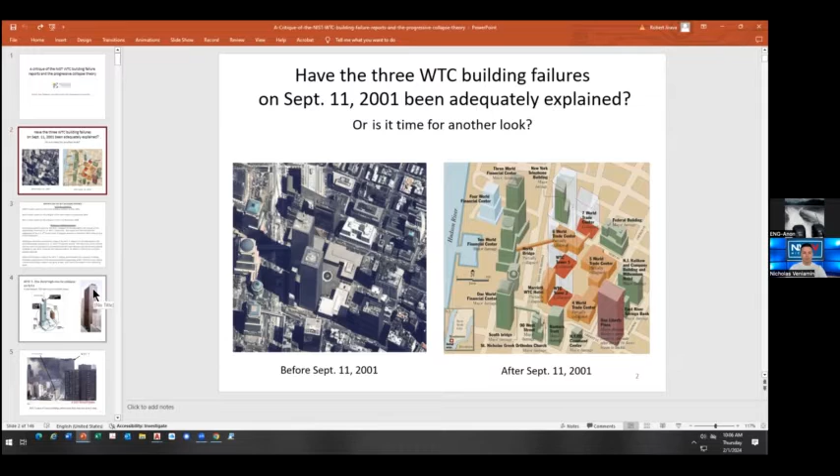This is a bird's eye view of it, what we call a plan view. What many people don't know, including myself until we took a good look at the evidence, is that this tower is built on a power station constructed prior to the tower going up. That power station is indicated at the footprint level in blue, the outline of the power station, and this crosshatch trapezoid is the outline of the tower built above it, World Trade Center 7.

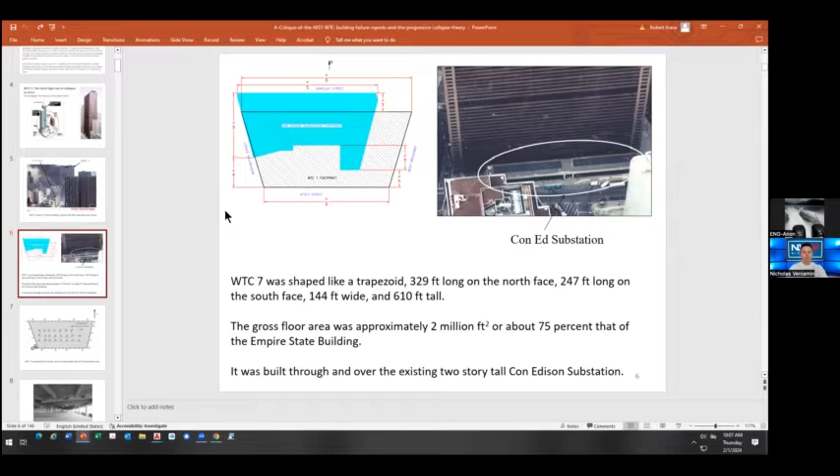This is a typical floor plan of World Trade Center 7. I hope you don't mind that I'm not dwelling too long on any of these slides, but one of the key areas as far as the official report has to do with this area of the floor plan, and in particular this column 79. They are labeled using these hexagonal numbers. A girder is a steel member in the floor supporting these beams in blue, the girder is in black, the beams are blue.

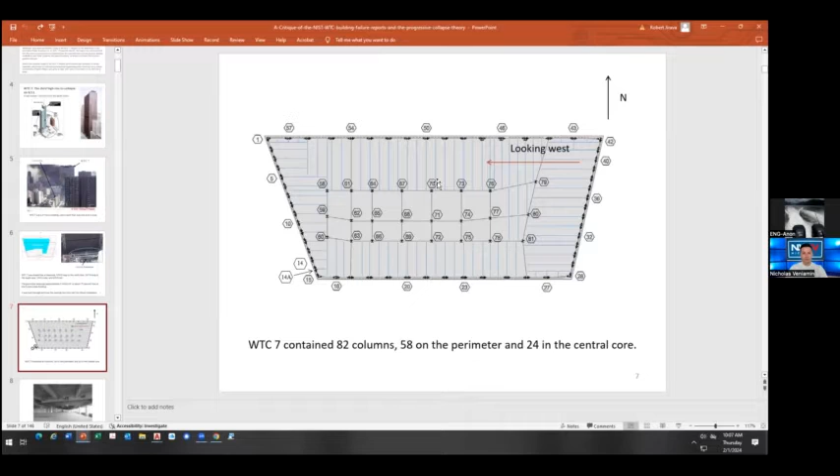In the subsequent slide, slide number 8, this shows what I was just pointing to. The black line is this girder, called a girder because it's picking up other beams. The NIST report relies on this area of the 12th floor level, supporting the 13th floor overhead, claiming fires burned here and caused this steel to expand. The fires effectively, according to NIST, pushed this girder off of its beam seat, which is off the extreme left of the picture, causing the girder to be unseated, and a progressive collapse ensued.

Now, we have gone through and shown that that is absolute nonsense. If we take a look at the video of that day, that collapse, let's see if we can get that to play.

There we go. For the third time today, it's reminiscent of those pictures we've all seen.

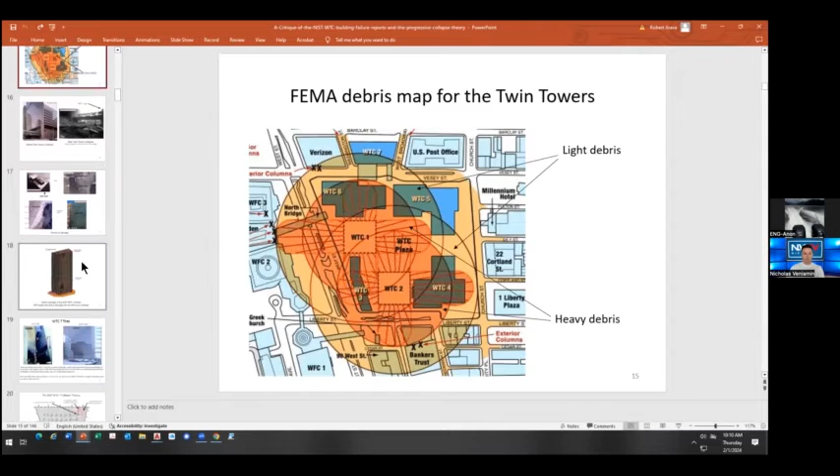NIST, when they modeled their building mathematically, took the trouble of representing the damage done to parts of World Trade Center 7 by the falling debris. Yet, oddly but not surprisingly, their report does not depend on any of this for the collapse.

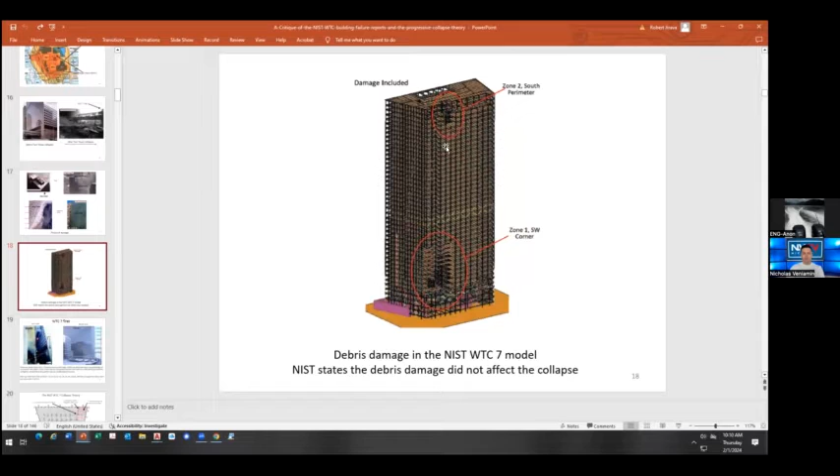Also, we have strong evidence that the fires NIST is alleging were happening on level 12 did in fact burn only for a short period and moved on. This is taken roughly 90 minutes before collapse, and you can see that the area where that column, beam, and girder I was talking about have long since gone cold, and the fire has migrated to the west, so it's no longer an issue.

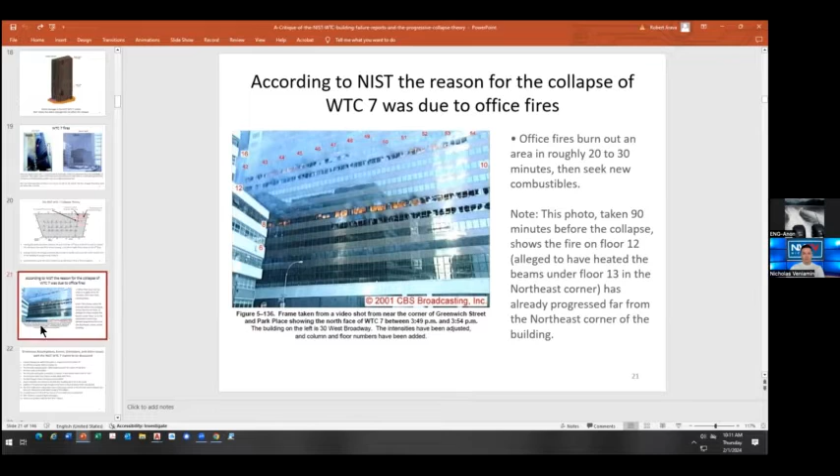We have evidence supporting everything, every step of the way. It does make me a little weary having to rush through it like this, because I cherish every piece of evidence. So I hope you don't mind, viewers, me flying through it.

In their report, NIST say the girder fell off the seat carrying it because it didn't have web stiffeners and wasn't retained by the column - it was just basically free to slide off. But we have located the steel fabricating drawings, and all of that information is actually recorded, and it shows that it's not the way NIST alleged.

You see, the girder end was actually fabricated with vertical plates called stiffeners, a standard feature in structural steel these days. In the 1980s, when this was going up, this was a relatively new development. It was designed to prevent local buckling and crippling of the end of the girder.

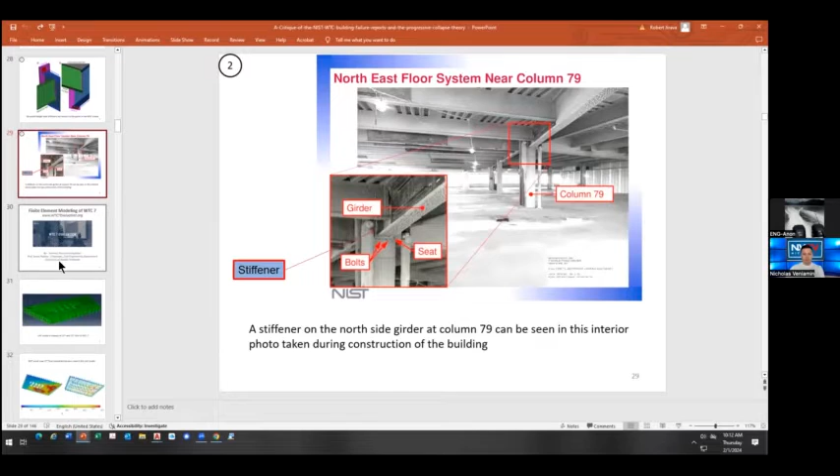Here you can see in this photo, slide number 29, that the girder was photographed indeed with those stiffeners in place. So it was also retained inside that column. There was really no way that the girder could have slid off its mooring.

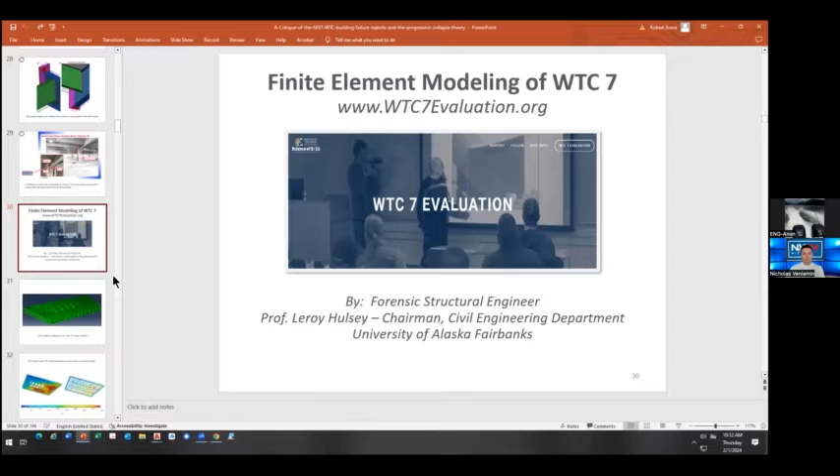There was a very careful analysis done by a gentleman called Leroy Hulsey, a professor at University of Alaska Fairbanks. He reconstructed World Trade Center 7 bit by bit, and subjected it to the fire loading that NIST alleges it used in its analysis. In short, we were unable to come to the same conclusion as NIST. In a nutshell, Professor Hulsey indicated that in order for the collapse to occur, we would have had to take out 8 floors of the structure in the lower part.

He stopped short of using the expression demolition because he does not want to be embroiled in any controversial matters. But he was actually hired by our organization, AE 9/11 Truth, and we have mathematically disproven that.

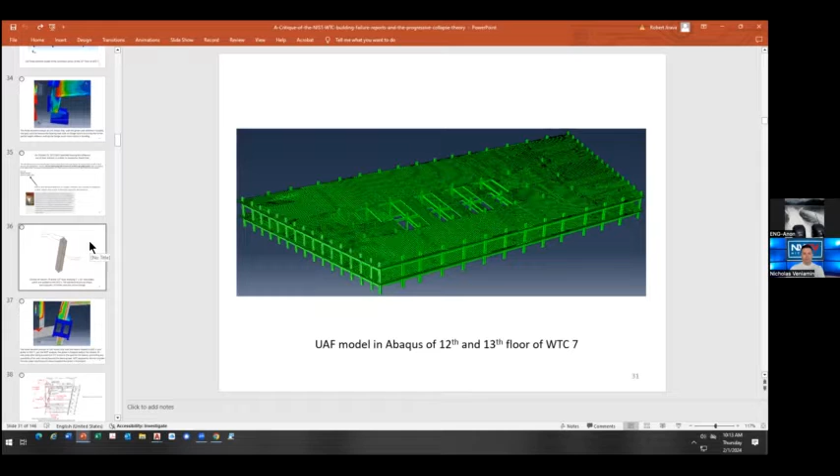Moreover, we have proven unequivocally that it's an impossibility for the collapse to take place, simply because if the joists - these beams holding up the floor - heated and expanded the way NIST says they would, they couldn't have pushed the girder off its seat far enough to cause this failure by bending the flange, because these vertical stiffeners are in place.

Now, this is good news for our argument, but it does, in a way, ultimately become moot, because the column wasn't constructed just as a plain I-shape. It also had these side plates welded to it for the full height.

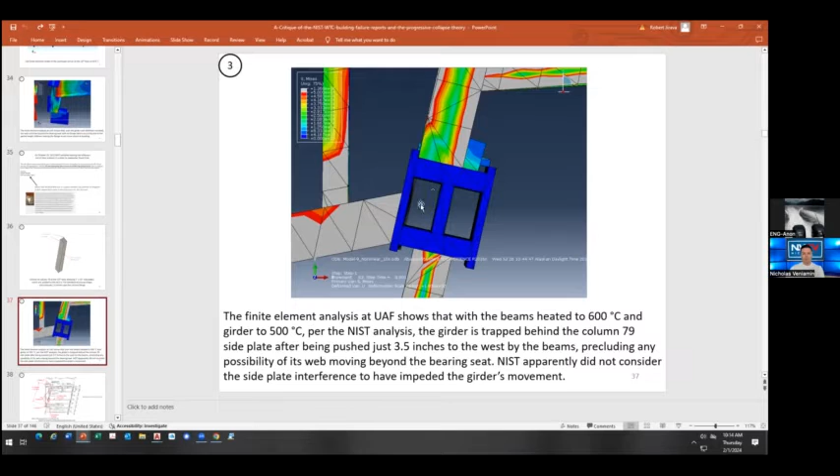The reason that was placed there was to stiffen the column so that it was compatible with the other parts of the structure. And you can see if this was pushing on the girder, it would have had no possible means of escaping that confined area, and the collapse simply would not have happened.

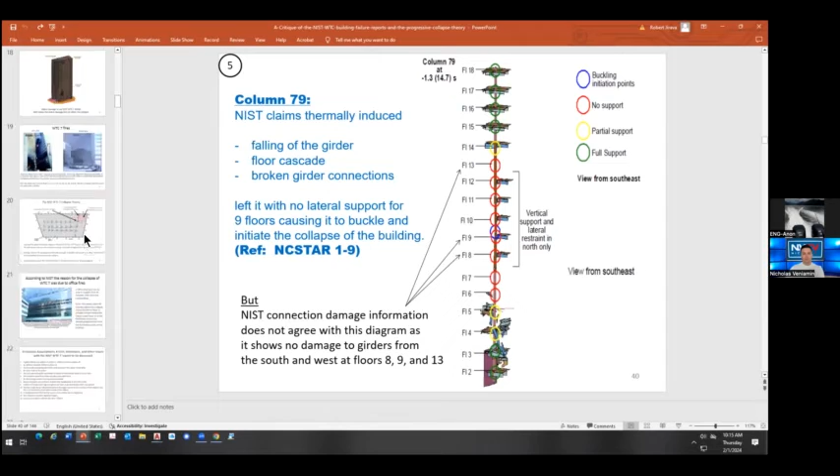I have to push ahead a little bit here. They also say that once that girder fell, the floor would have collapsed, leading to a pancake collapse of 8 levels, leaving this long, spindly, exposed column. It doesn't make sense to me, however, when I take a look at that plan, I realize that column number 79 is actually supported on every floor by these 2 beams framing into it. So it couldn't have possibly been that unstable as to buckle and fail.

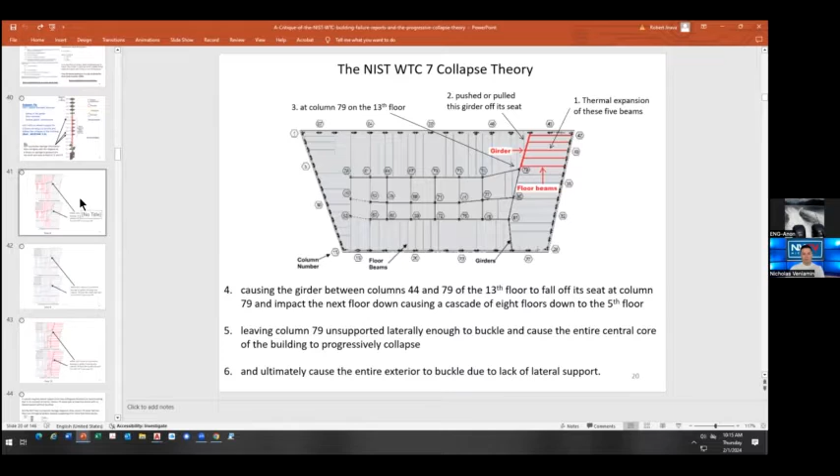So it's really, really treading on thin water. And NIST actually contradict themselves by indicating that in order to keep standing, the building would have had to have those connections anyway. So it's full of contradictions.

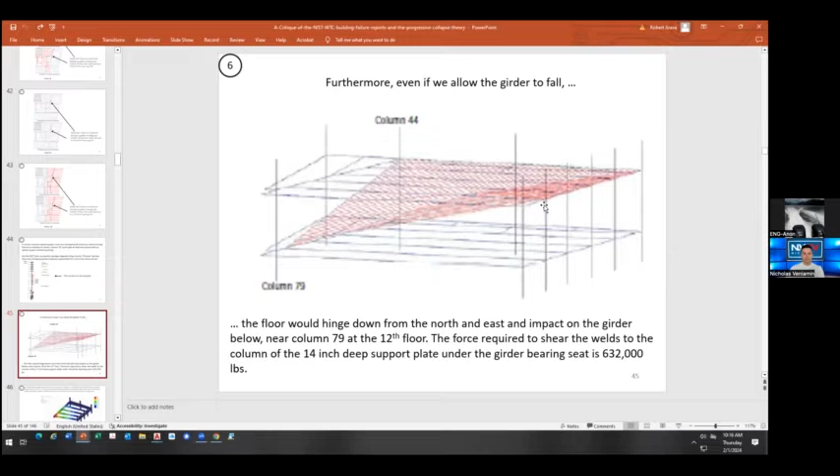We also found that if the girder were to actually unseat at that location, the floor slab - because the concrete floor, and this is an important aspect of all 3 towers, the concrete and the steel were integrated together - so that if the end dipped down, it would only tap the lower level, and the remaining 2 sides, like a diving board, would remain standing.

We've even modeled that in a modal sense and found that this would at worst be a dip with potentially a tap of 20,000 pounds onto a level below. And that connection actually had a capacity of something like 600,000 pounds. So there's no way that the collapse could have taken place.

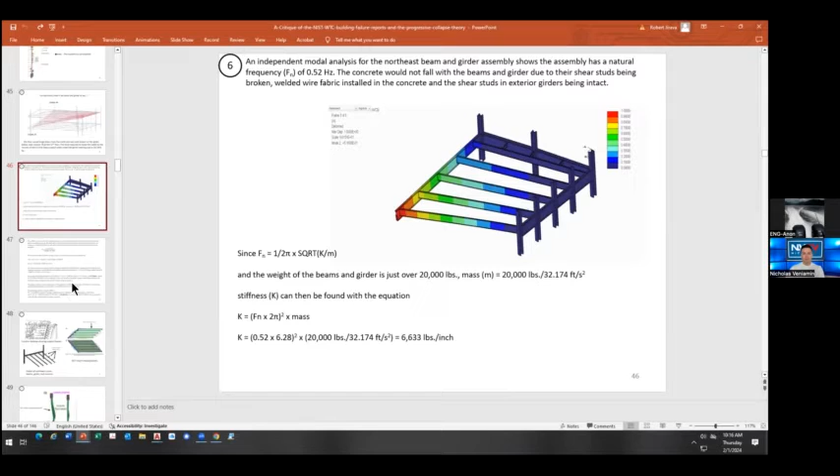So as we go through, we're refuting the NIST left, right, and center. And when they did their mathematical models, NIST included these notches in the middle of their beams, which were actually not there. This was highly suspicious. It was as if they modeled the structure to collapse on purpose so that all of these beams would hinge and pull the outside walls in to initiate a collapse.

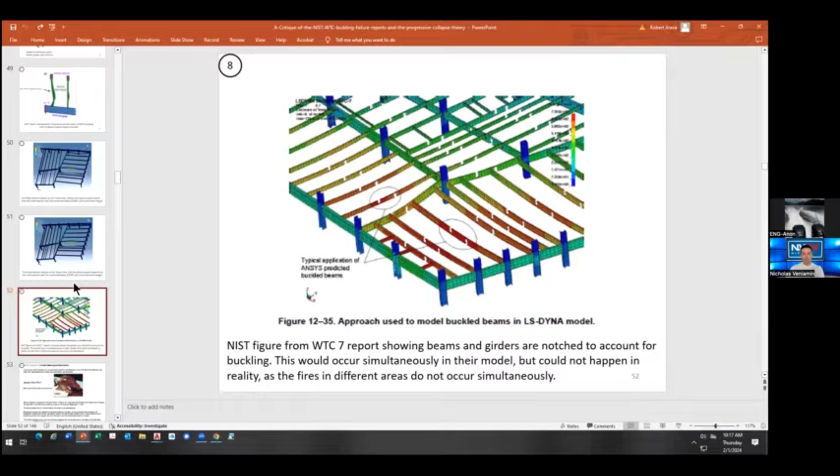Let's see here. Something also unknown to the public, this was a thermal image taken, I think, 5 days after the collapse that indicated very hot areas on the site. This is where the Twin Towers stood. This is where World Trade Center 7 stood. And you can see that the hot areas here are molten steel. Basically, the steel is molten inside that structure.

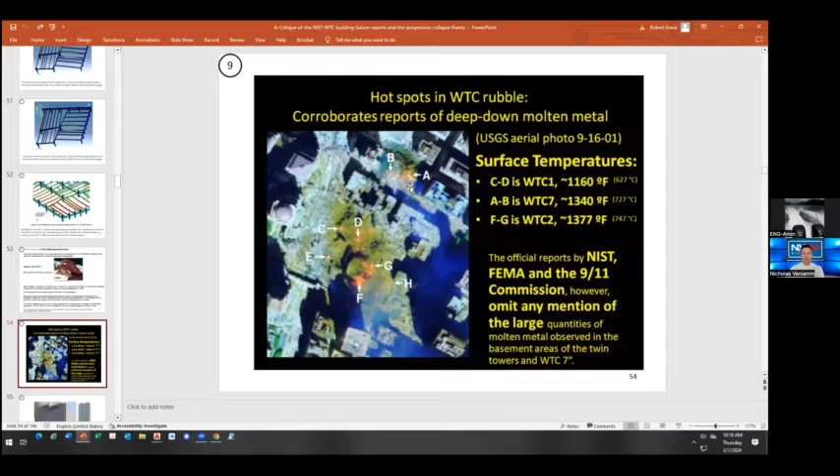There were eyewitnesses, if you recall, those firefighters that were talking about it being like we were inside of a foundry when they went down into the wreckage.

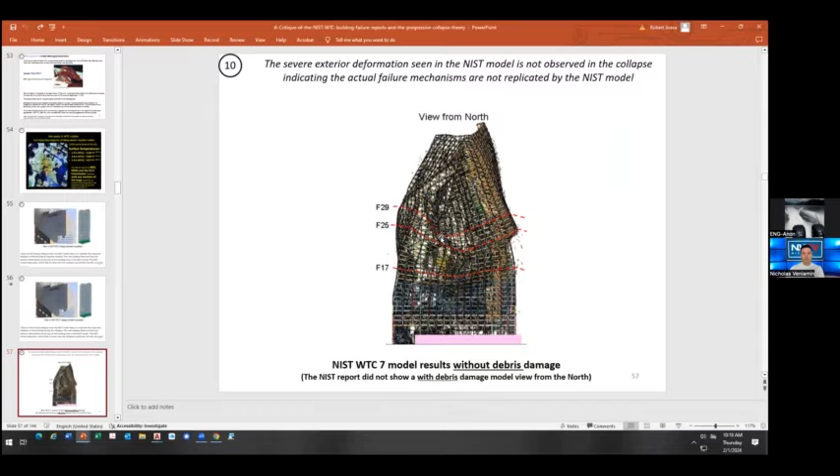And here I have a picture of the NIST model. When the NIST model is allowed to run its full course and animate the collapse, it actually looks like a wet cardboard box. And when we looked at the video, we can see that the thing does actually fall down in a nice cohesive manner. I'm just going to quickly play this, and then I have to push ahead to World Trade Center 7.

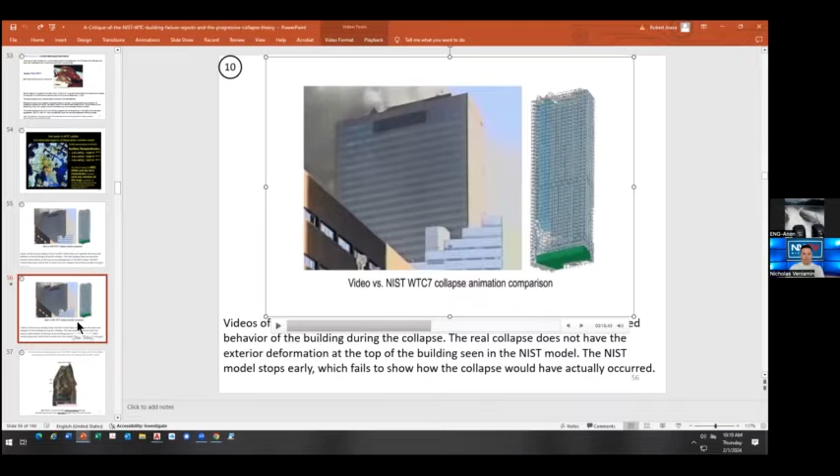So you see that the whole thing sort of falls in one piece, but it's possible to see a little bit of the collapse initiating at the inside. So what we have basically found is that the collapse could not have taken place unless several floors were removed. It does not happen at all the way that NIST claimed that it does. We have effectively refuted that.

So that is World Trade Center 7. It's very mysterious, and officially NIST's story is that the building collapsed due to office fires. What lit those office fires isn't really ever discussed. Did the debris flying from World Trade Center 1 ignite the fires? It isn't really made obvious to us how that took place.

Weird things were happening there. The 23rd floor was occupied by the Office of Emergency Management, which was set up by Rudy Giuliani following the 1993 bombing of the World Trade Center. They constructed a bunker up there, which had like 40,000 gallons of diesel. And in the NIST report, they're saying that there was no diesel contributing to the fires. So really suspicious things were going on that day.

And the weirdest one was somebody alleging that they were an engineer who worked at the Office of Emergency Management, came down and told firefighters and rescuers, I'm a structural engineer, I've inspected the building, stay out of it because I've noticed some areas that look like they're about to fail and the building is about to collapse. That person, that mystery person who has never been identified, had considerable authority that day, and people listened to him and they were afraid.

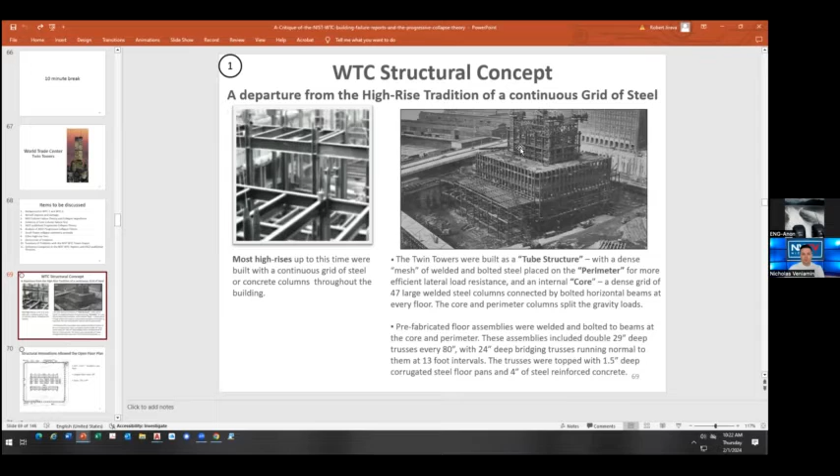So we're going to construct these as a tube structure, so there will be many columns forming the skin. It's not unlike, I suppose, a Coke can, an aluminum can, which has a structural skin on the outside. But because these floors are heavy and carry a lot of load, there also has to be something called a core, which is a group of interior columns holding more than half of the weight.

Bird's eye view, you can see the core is also designed to carry all those elevators. The elevators have to be there. To service a building of this height, it's very elevator intensive. They divided it into 3 lifts where you started basically at zero at each of those lifts, at about 33% of the overall height. They were intermittent, I think something like level 40 and level 80 or thereabouts. You arrive at those floors, and then there were elevators grounded to those floors that could service the rest of the building.

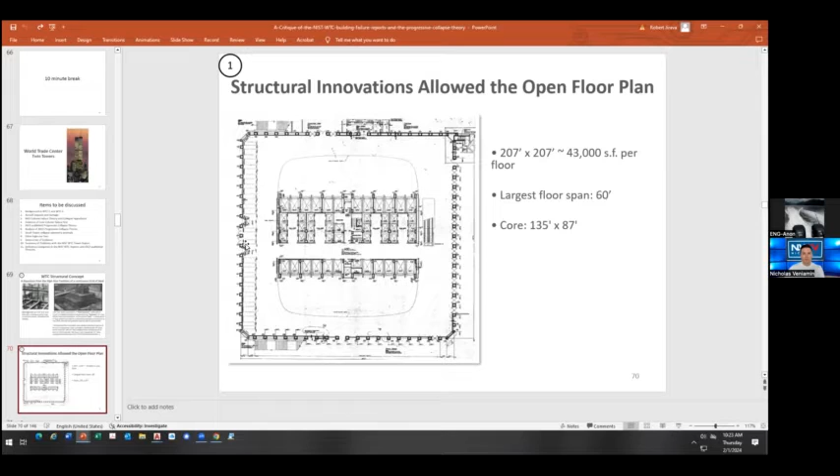So really big challenges have to do with building this high. The core stiffness and the outer tube stiffness are different, so the overstrength relatively is a lot, there's a disparity in overstrength. These inner columns, because they're working harder, carrying most of the gravity load, were over-designed by a factor of approximately 3. The outer columns, because they're engaged not just in carrying gravity but also in resisting wind load, are over-designed by a factor of 5. So there's a lot of redundancy in these buildings, okay?

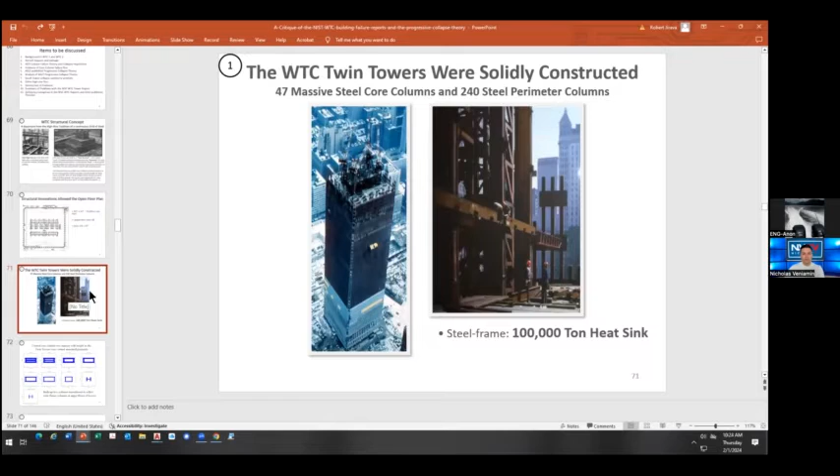And as they were built, the steel had a mass of something like 100,000 tons. So this was really appreciable construction. If we look at the mass of the columns at the lower level, we can see these plates are something over 5 inches thick that were used in the steel, and we're talking about overall dimensions of approximately 2 feet by 5 feet in this member - something that weighs 3,000 pounds per linear foot.

And it gets lighter and lighter and lighter as you get to the top. The topmost members were weighing something like 200 pounds per linear foot, and they were just basically a plain I-section.

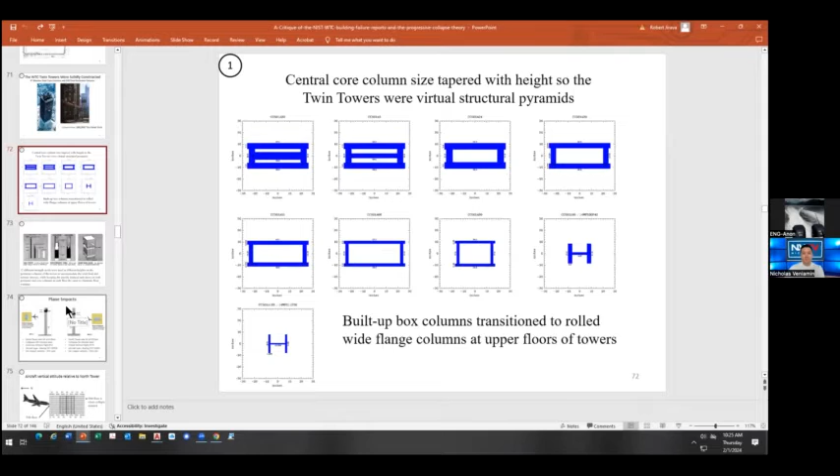Another thing not appreciated by people generally speaking is the steel gets heavier and heavier. It also gets stiffer as we get to the bottom level. So if this ostensibly collapsed, it would be collapsing onto stronger and stronger structure. And ultimately we would be expected to pulverize and make go away column sections that were just this massive. It's hard enough to get those things to topple over and move. They're so awfully heavy, it's just inconceivable that something like that could take place.

The impacts on the towers looked something like this. There were a little bit higher up on the North Tower and a little bit lower on the South Tower.

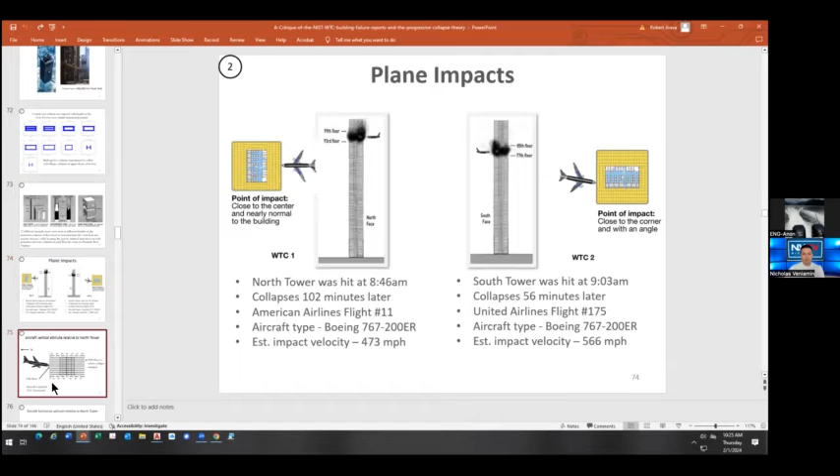The North Tower stood longer than the South Tower did. And when the plane hit, it hit slightly at an angle. I get a lot of flack from people alleging that there were no planes.

Hey, we proved there were no planes. Can we move past that? I haven't really looked at any arguments. I'm not saying that there were planes for sure.

I'm just presenting this hypothesis as though there really were planes, and I believe they were used for theater more than anything else, because these buildings were so massive. We're talking about 300 tons for a plane versus 500,000 tons for the building, so the building weighed something like 2,000 times the weight of an airliner. It isn't really going to even shudder when the plane flies into it.

Moreover, the plane is made out of aluminum and it's fairly soft, so it has to have the advantage of speed to make up for that, because really hard metal like steel is going to shred a relatively soft metal like aluminum and do a number on it.

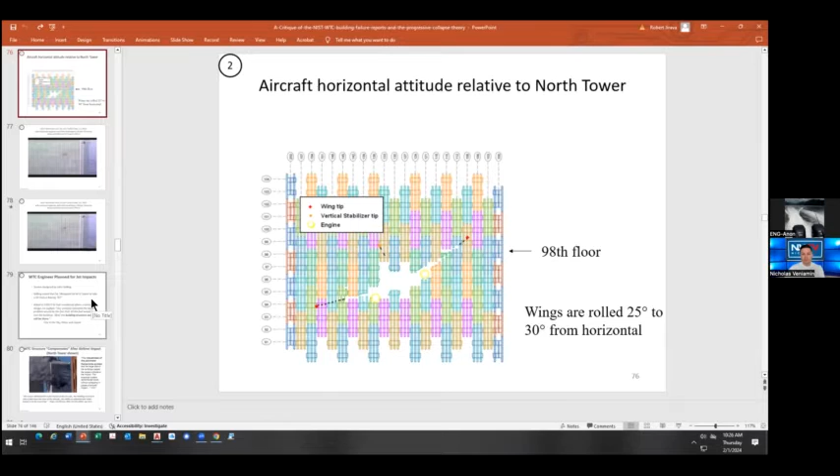Now, I just want to get to the right slides. So let's presume that the plane was shredded because it's softer than the steel beams of the towers.

Would that mean that the planes never went into the buildings then? So it was shredded and stayed outside. How about the explosions? Because the explosions look like they came from the inside outwards of the building.

Well, what we're saying is that the plane's wings are basically flying fuel tanks, and when those wings would impact that row of columns like they did, that would cause the fuel inside the wings to aerosolize, and that would account for much of the fireball that erupted out of the building when all that jet fuel was turned into spray.

Some of it migrated into the building, but we have found that that fuel very quickly burns off, relatively speaking. It's gone, consumed within about 5 minutes, and then the structure will cool slightly as it settles into burning and consuming the regular combustibles inside the building.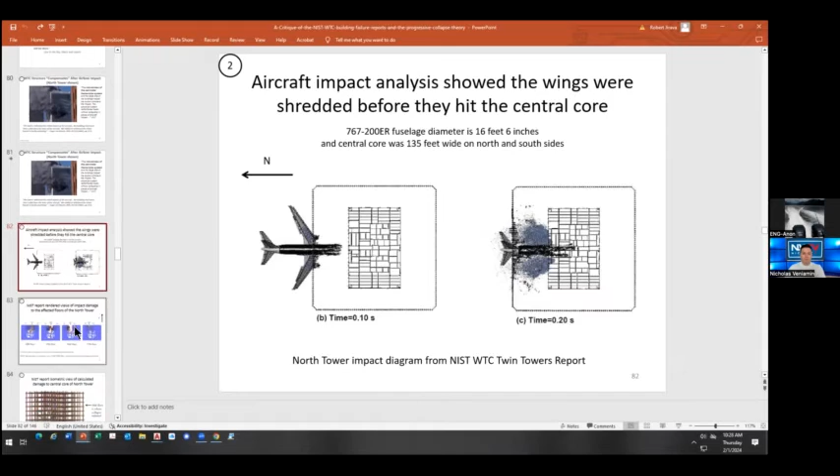Here you can see that it did have speed working for it, and NIST, we went along with their descriptions of the damages alleged to the various floor levels. There was clearly a loss of some floor at the lead-in.

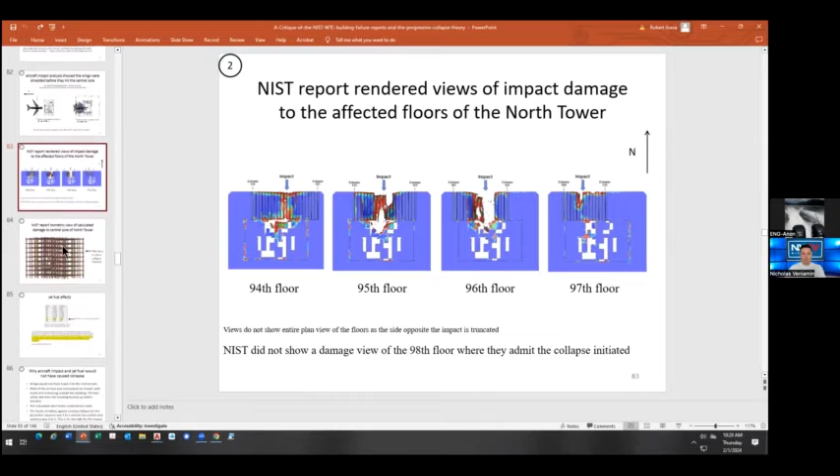Now we are looking at the North Tower here, obviously, and like I said, the missile, which was the plane, did have the advantage of speed, even though it was highly disadvantageous because the aluminum metal is much softer than the very hard steel.

Here you can see that NIST have clearly modeled the destruction inside of the footprint. Now, the substance of NIST's collapse theory is essentially this: they are saying that the buildings failed on the outside first.

Why that happened, according to them: the fires, instead of heating and expanding the beams like they did in World Trade Center 7, the beams in this case sagged, became soft, and pulled the columns in. Now, this collapse theory is nonsensical because this is omitting one key aspect.

The concrete slabs that were poured on top of this wouldn't go into tension and pull the column in, because the hard concrete slab poured on top of this, that deck, is pushing back and resisting this.

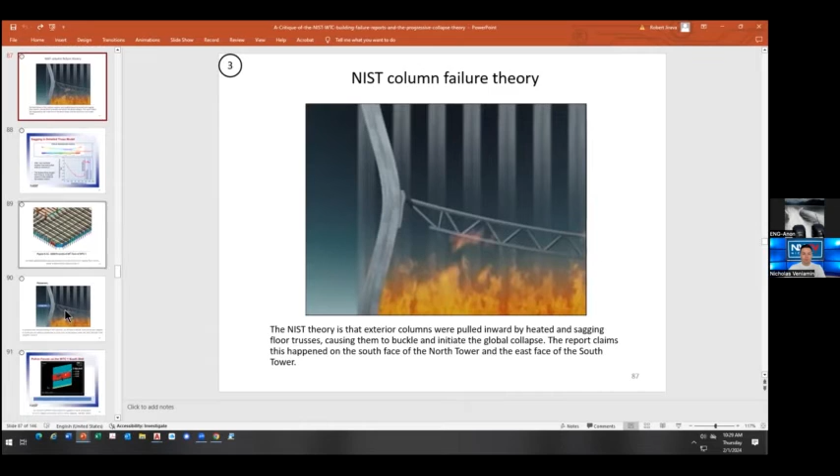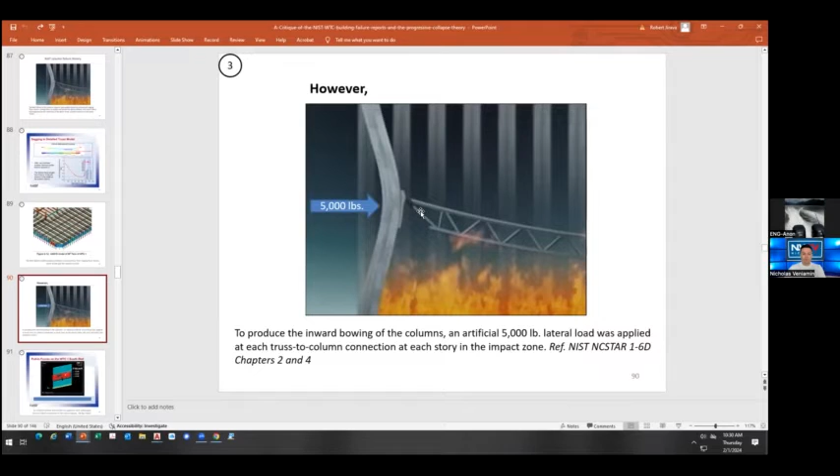In order to make its collapse theory work, NIST applied an artificial load of 5,000 pounds at each of these beam connections, happening every 6.5 feet or so. That would have resulted in a huge, like 750,000 pound artificial force being added to the outside of this building as it stood at rest.

Now, that is absolute nonsense because the floor slabs were mostly still intact and they were causing an equilibrium there. So this mathematical modeling put forward by NIST is absolutely nonsensical.

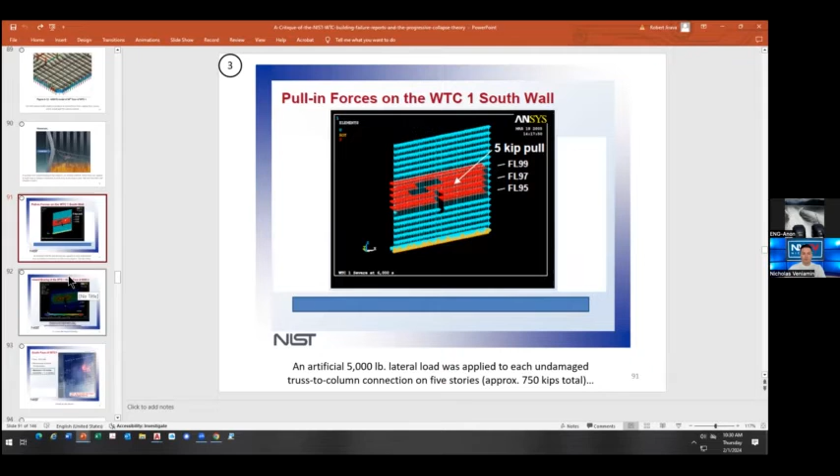I was going to say, so are planes capable, in your opinion, of hitting a building and a building coming down straight down smoothly as if it were an intentional demolition? Well, we'll talk about straight down smoothly, but in my opinion, where I'm at now, I believe that this building could have withstood not just one plane impact and stood standing.

For the original designer said that you could practically remove all of the outside columns on one face and 50% of the columns on either adjacent face -- no, it was actually 33% of the columns on either adjacent face.

Due to its redundancy, the loads would reroute themselves and the building would remain standing. I would go so far as to say this building could have taken multiple plane hits and remained standing, as far as the structure goes. It was that redundant.

You don't believe that maybe there were explosives from the inside? Some people believe the planes were holograms, and as they appeared to hit, the explosives were activated—dozens of them. What are your thoughts?

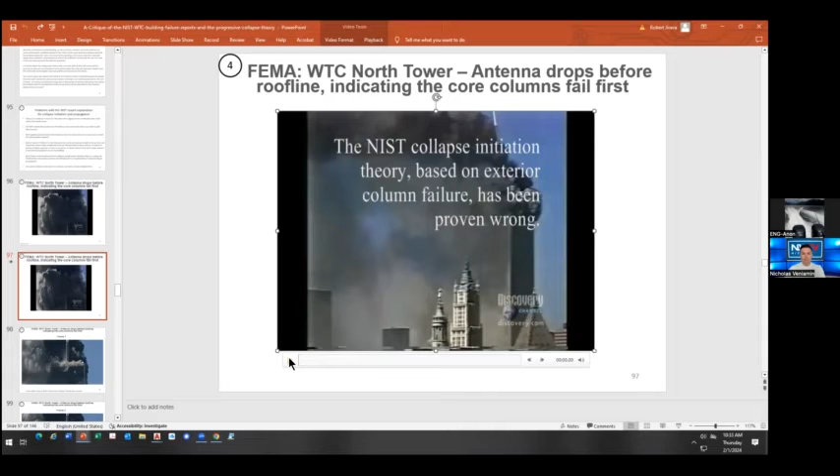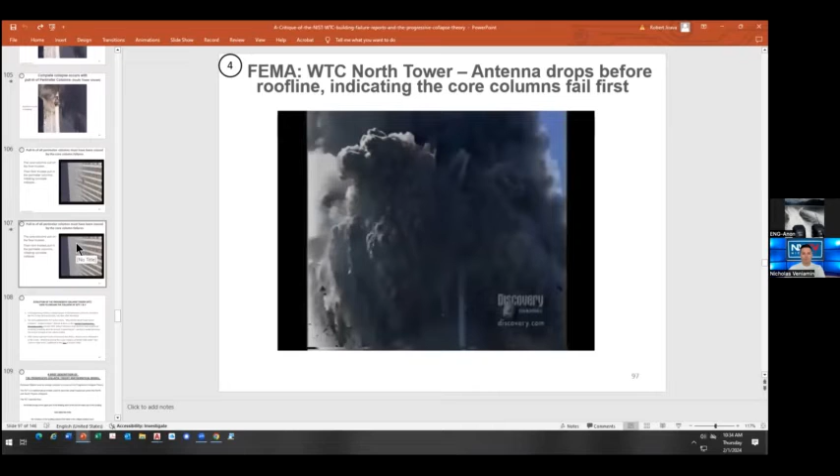We're saying that's not the case at all. What actually took place was the core columns had to let go first, and our main evidence is that antenna tower on the North Tower, which provides a clear, irrefutable visual indicator. What really happened was the core was brought down first, which caused a rotation of the floor systems that pulled the outside walls in, accounting for the bowing photographed on the outside. That's what actually caused the collapse mechanism.

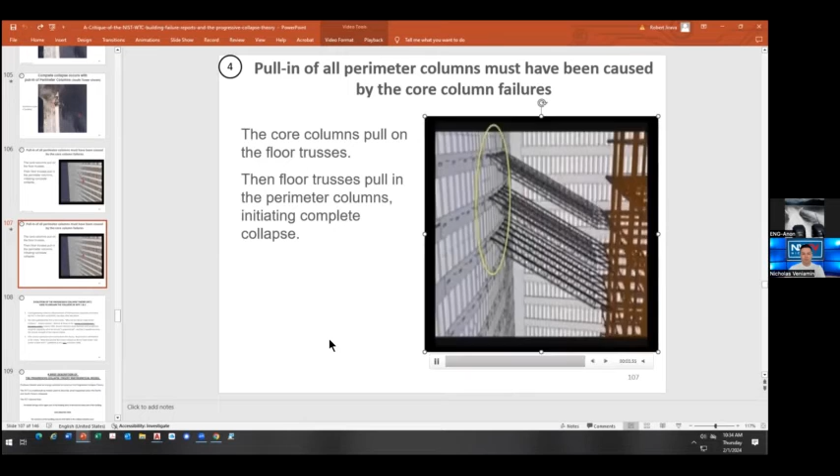So it's in fact the complete reverse of what NIST says. I unfortunately have to roll on here, and I'm going to spend time on just one more slide.

I'm going to talk a little bit about the destruction of the evidence. This is that same gentleman from FEMA, talking about evidence disposal.

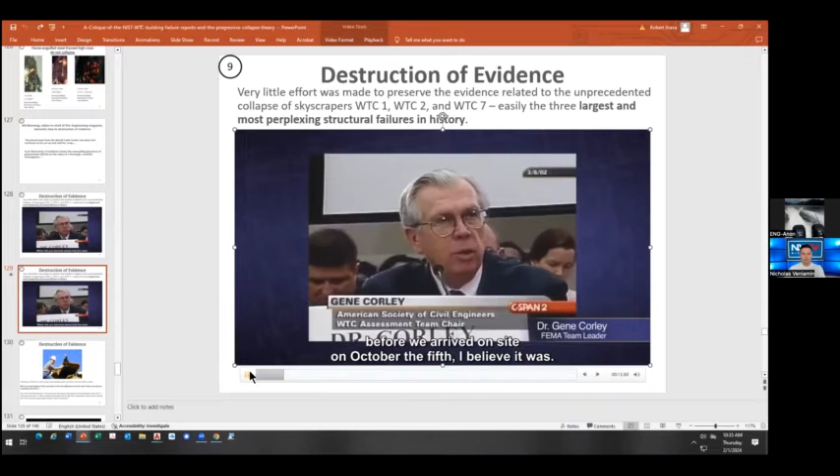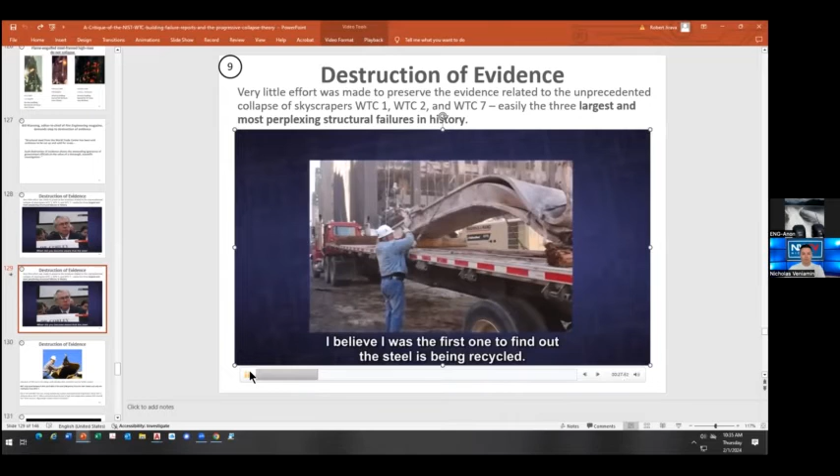When did you become aware the steel from the World Trade Center was being sold off? I think it was on the order of a week or so before we arrived on site, October 5th I believe it was. So in other words, the city was disposing of material within two weeks of the actual event? I believe I was the first one to find out the steel was being recycled.

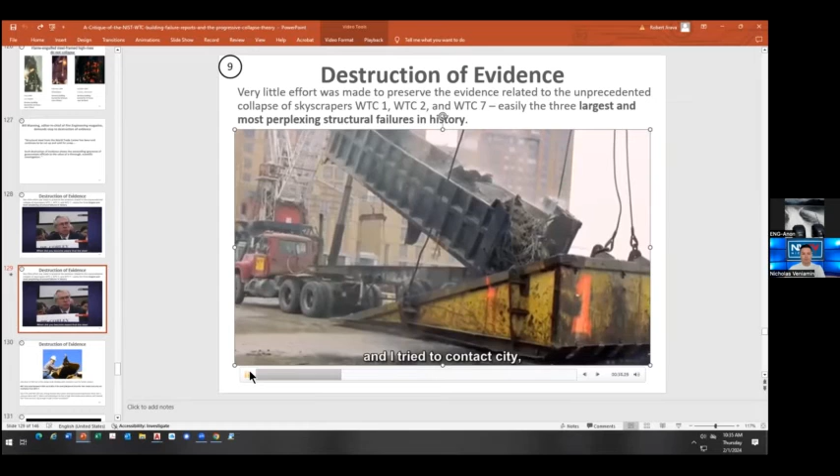New York Times reporter Jim Glanz told me two weeks after the collapse, and I tried to contact the city, and New York Times reporters also tried to make sure we could have access to the steel to do research. It was not happening. I just think there's so much that has been lost in these last six months that we can never go back and retrieve.

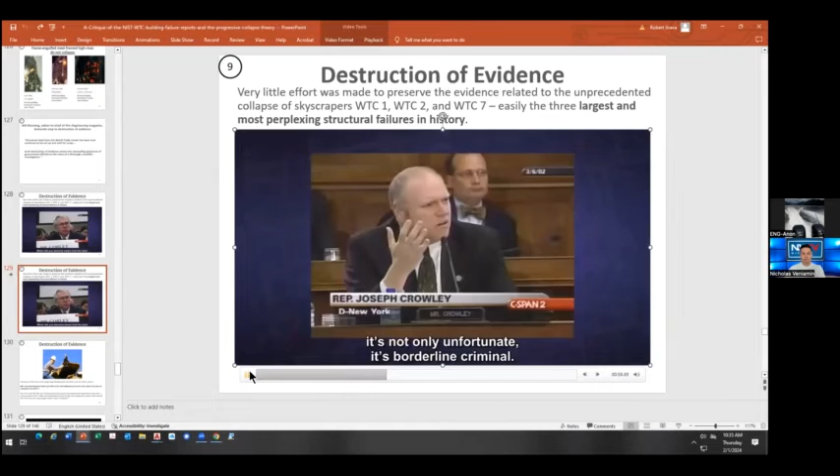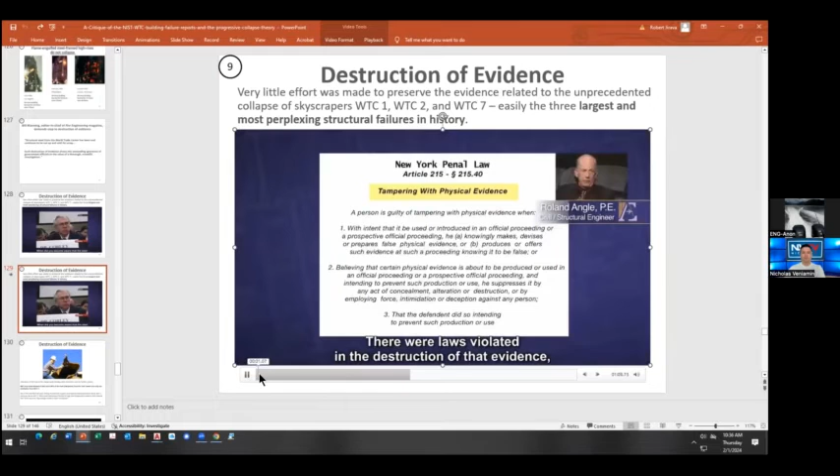It's not only unfortunate, it's borderline criminal. 400 truckloads per day of material were taken from the World Trade Center site and sent to China for recycling. There were laws violated in the destruction of that evidence, and for the American Society of Civil Engineers to ignore those events is extremely disturbing and, in my opinion, a violation of their professional code of ethics.

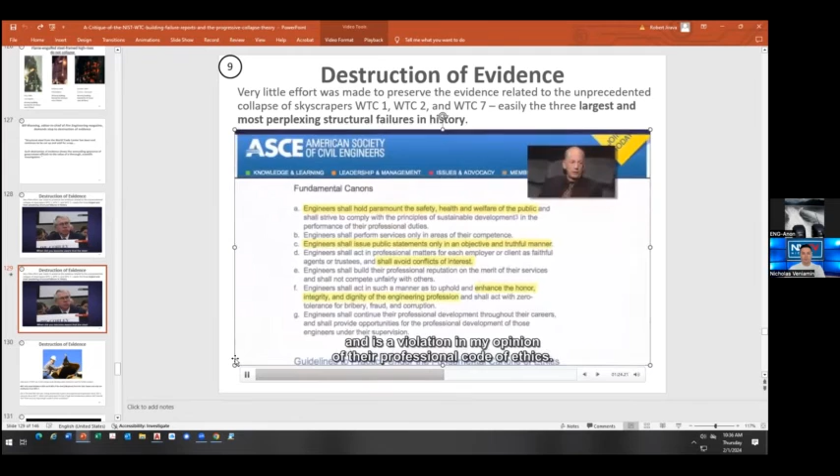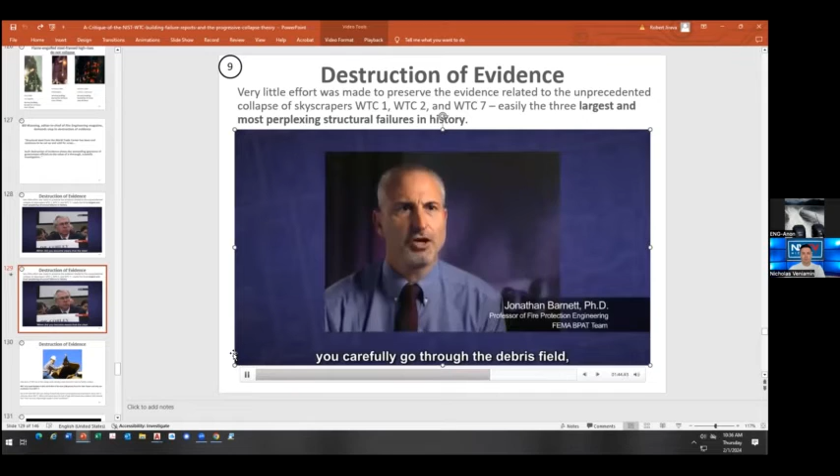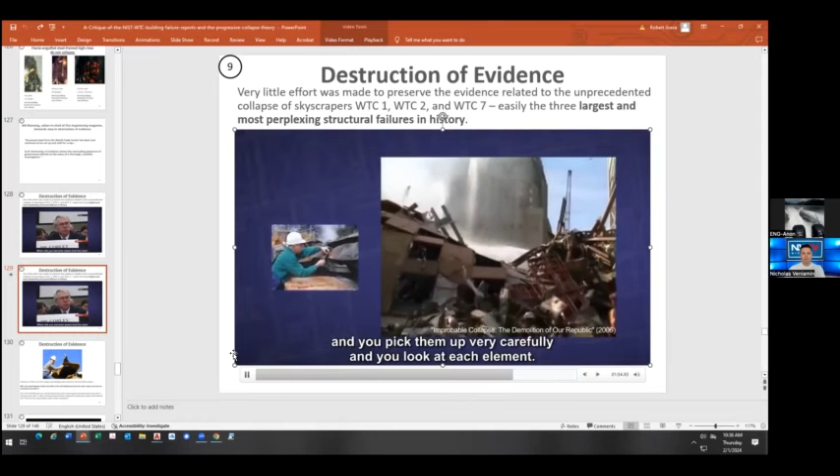It was contrary to the way all investigations are done. If an airplane crashes, they seal off the entire area, nobody touches anything, they move it to a secure location and reconstruct the aircraft. Normally, when you have a structural failure, you carefully go through the debris field, looking at each item, photographing every beam as it collapsed and every column where it lies, and you pick them up very carefully and look at each element.

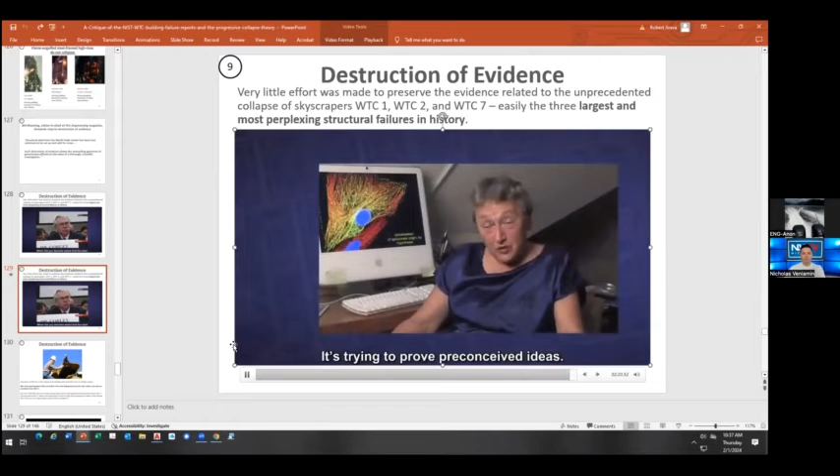We were unable to do that in the case of Tower 7. You can't do science when you are deprived of the evidence and when your hypothesis is the least valid instead of the most likely—when the most likely hypothesis in the case of Building 7 wasn't even mentioned. This is not science. It's trying to prove preconceived ideas.

According to NIST, these buildings were brought down by fires, and these would therefore have been the first steel high-rise collapses ever in history due to fires. Why on earth would we decide to dispose of the evidence so rapidly after a historical event like this? Shouldn't we stop and try to learn from this? Why did these buildings collapse the way they did?

I just wanted to point out one last thing here, and then I have to push ahead. They've only saved 236 pieces of steel out of tens of thousands from the Twin Towers, and only one small piece from World Trade Center 7. This gentleman is from NIST, and he presided over the investigation that NIST conducted. I take real exception to the way that they handled this evidence.

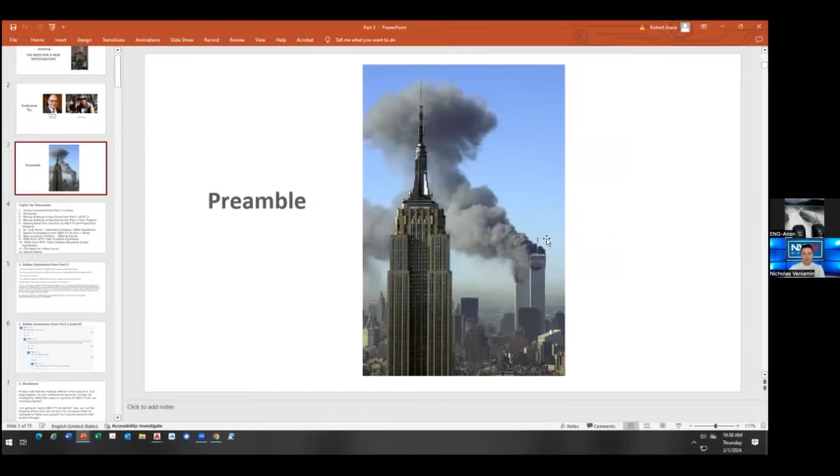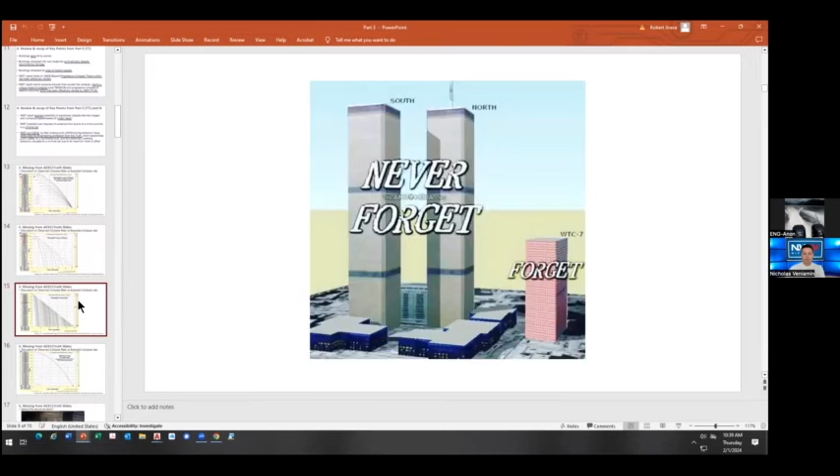There was a lady who made the rounds, her name is Judy Wood. She presented some of the anomalies that weren't addressed in the official reports. One of them was the free fall speed of collapse. Using just plain kinematics, no structure involved, if each of these floors actually got hit and moved from rest, which would have to happen, the collapse wouldn't take about 10 seconds, which was observed, between 10 and 15 seconds, which the Twin Towers were observed to fall at. It would have taken significantly longer than that if we cascaded these and made them additive, because let's not forget, these are at rest when they're impacted. So there's definitely some anomalies that we've seen.

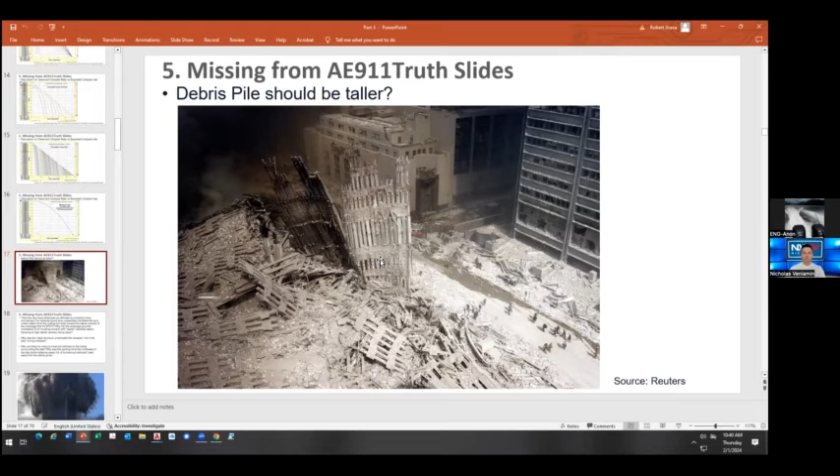One of the anomalies was witnessed by people at Ground Zero on the day that the debris pile looked as if it had disappeared. A famous segment of video was caught on Peter Jennings, where a young George Stephanopoulos is attending the site as a young reporter making a name for himself. He commented that it was as if the debris disintegrated, as it evaporated. Somebody said that it fell through the basement, but he commented that it almost isn't even there. Those were his initial observations, and people were quite dumbstruck that this didn't look like anything they were expecting to see, a pile about a fifth as tall.

People were also pointing out that the debris did scatter all around the site, and it laid down there. So I would have expected to see many more slabs in pieces, because they were reinforced with steel, they should have been more cohesive. Thermite was observed all over the place, and there was ejecta, debris flying at a considerable lateral speed. Why was the intact structure not in the way and dissipating energy? One of the main properties of structural steel as a building material is ductility, meaning it can deform and absorb energy. Much like a crushing Coke can, it will crush, and thereby take energy out of the sledgehammer that's trying to crush it. So we definitely were expecting to see some slowdown as the building crushed.

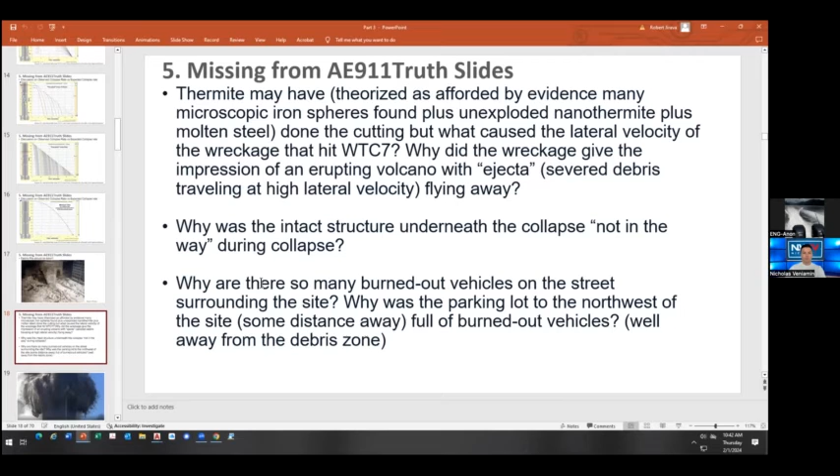Something I didn't really show in the previous section was the top of the structure that is alleged to be the sledgehammer - it disintegrates upon the fall. It kind of gets out of its own way, and there's nothing left to create the fall. So it's clearly aided by something. I noticed how many burned out vehicles there were on Ground Zero, they were all over the place. They were in areas somewhere as much as half a mile away, where half of the car is intact, brand new, like it came off the showroom floor.

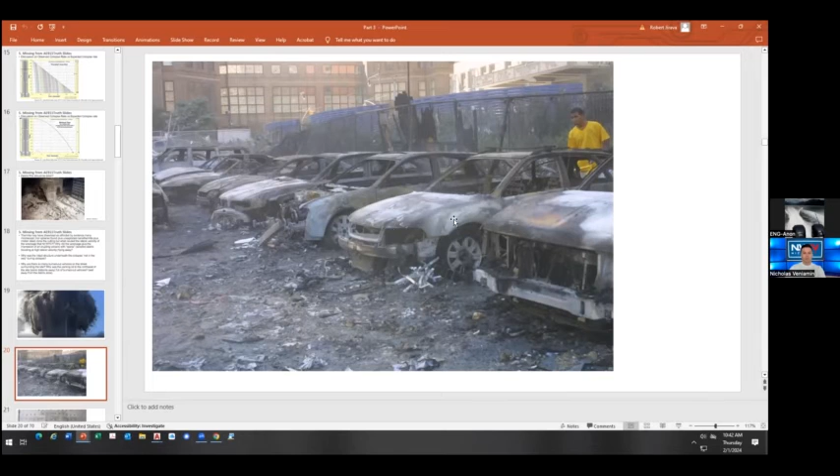The other half is burned like this, and it wasn't even near ground zero. There were kinetics flying around impacting adjacent buildings, but in an area that was relatively free of debris, things were still toasted. It was peculiar.

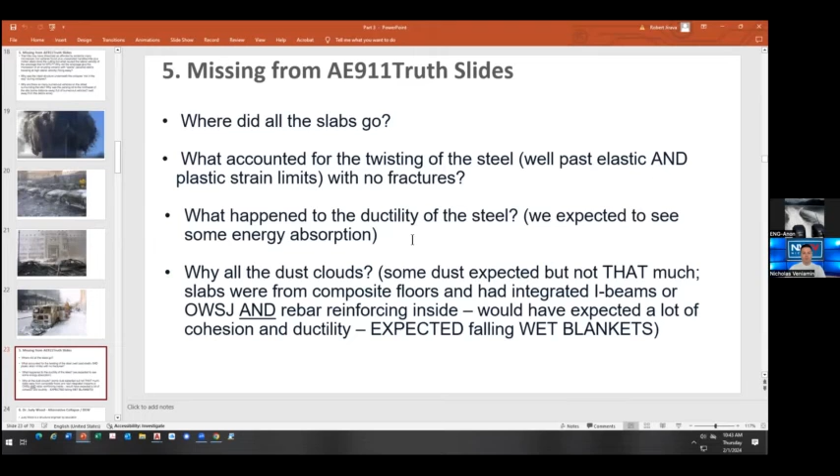So Judy pointed these things out: the slabs, what accounted for all the slabs, the twisting of the steel that was observed. Steel was not kinked as you'd expect from cold deformation and buckling, but parts were bent as if superheated. And why all the dust clouds? There was so much pulverization happening as it was falling.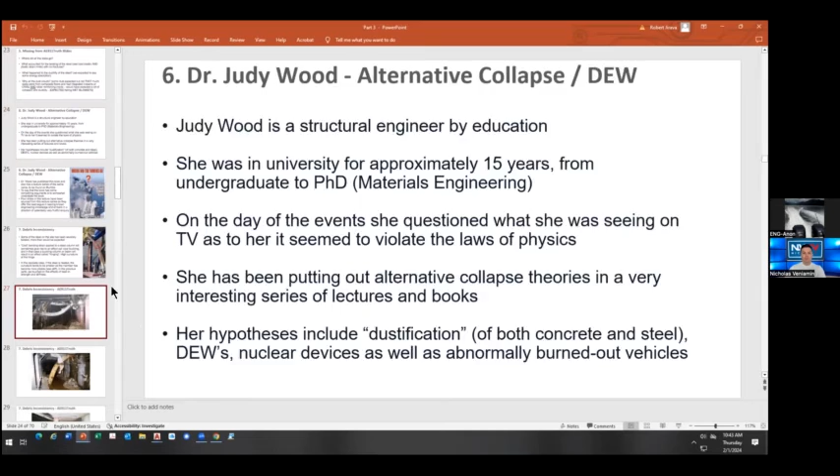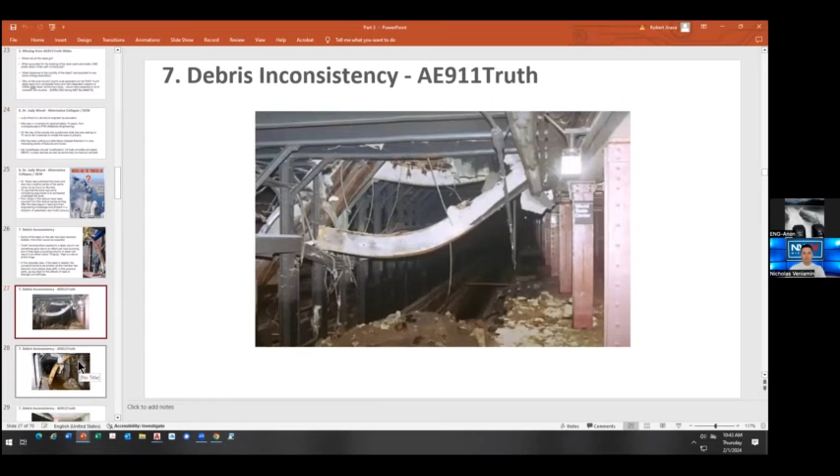I'm talking a bit about Judy Wood, but I want to push ahead and show this underground, underneath the basement of the World Trade Center. This looks distorted due to heat, well away from any action, deep underground. This is actually over a subway that ran underneath the complex. You had steel clearly heat deformed down there, and steel columns also clearly heat deformed. This is not a mechanical deformation—it does not happen due to mechanical agitation.

There you can see some of the collapse that did make its way through. But there's also this discoloration that appears on the steel as if it was heated and the paint or primer cooked off.

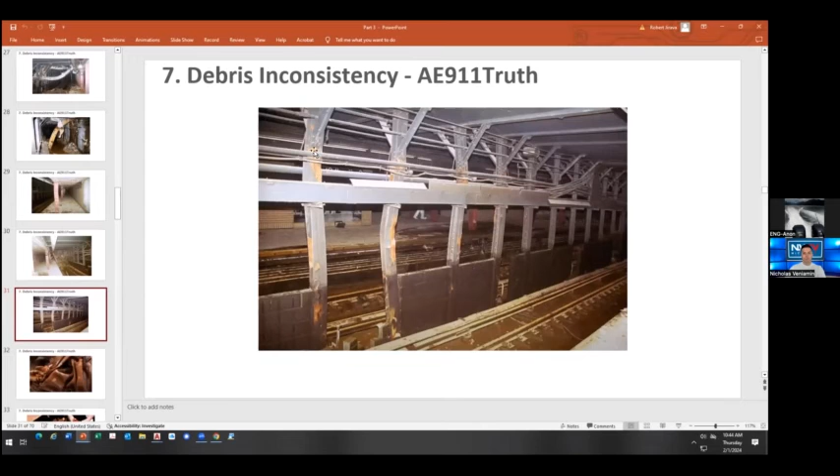Really weird stuff. Sorry, Nick, am I flying through this too quickly? No, it's good, it's good.

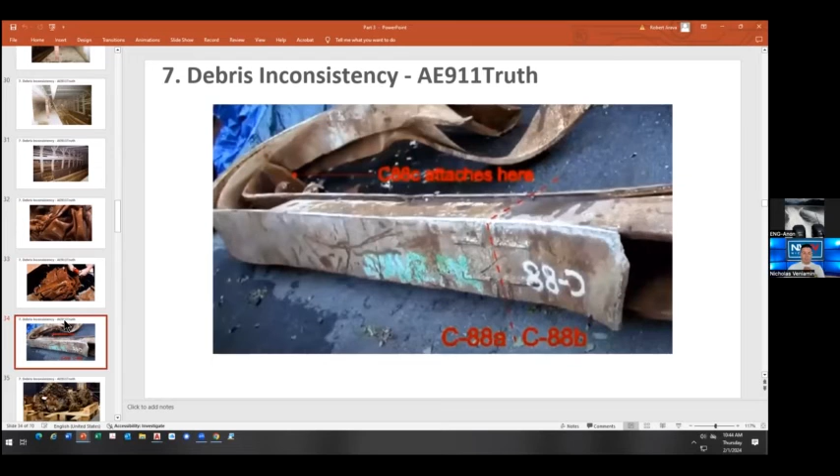I mean, it says a lot when the steel was taken to China, doesn't it? For them to recycle, because the elites, the globalists, favor China. They're in bed together, so it's very clear who's doing what. Well, there may well have been some cooperation there.

Just pointing out here that there was an agglomeration of concrete and steel mixed together as if it was superheated. They refer to these pieces as meteorites. Funny enough, look at this bending.

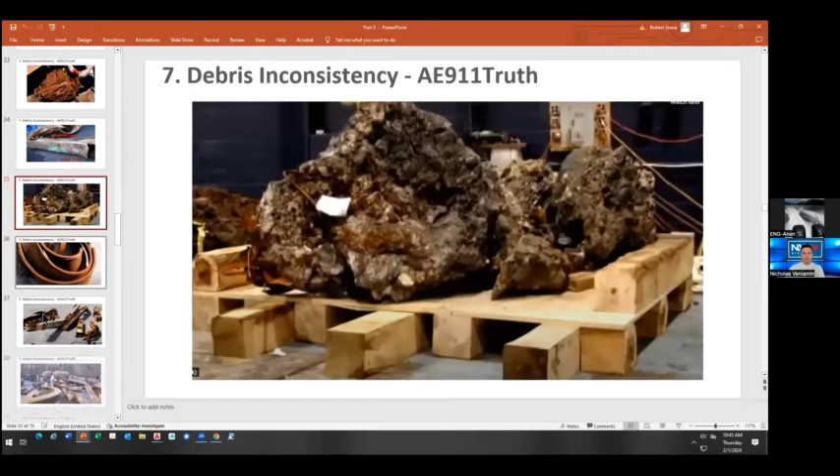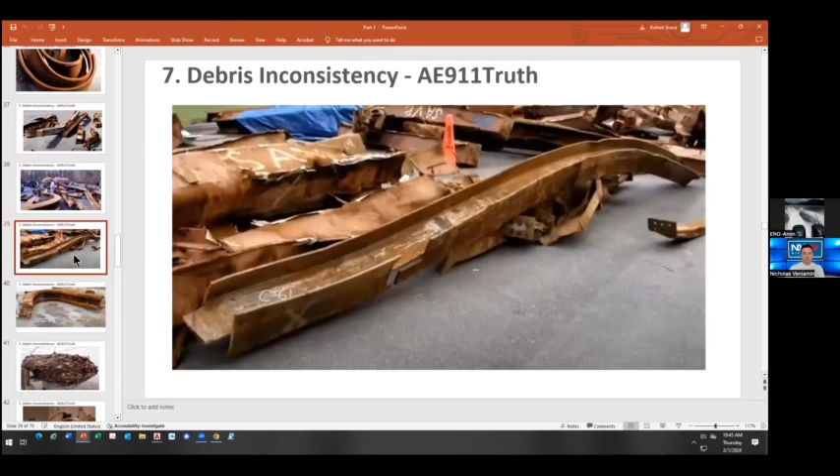You'd see something more like a kink. This is a fairly heavy section, so you'd expect it kinked mechanically at the end, not twisted to ribbons like this. Look at this one—it's so evenly heated as if it was softened and made pliable due to temperature so it could bend that way. Clearly these are not from mechanical effects.

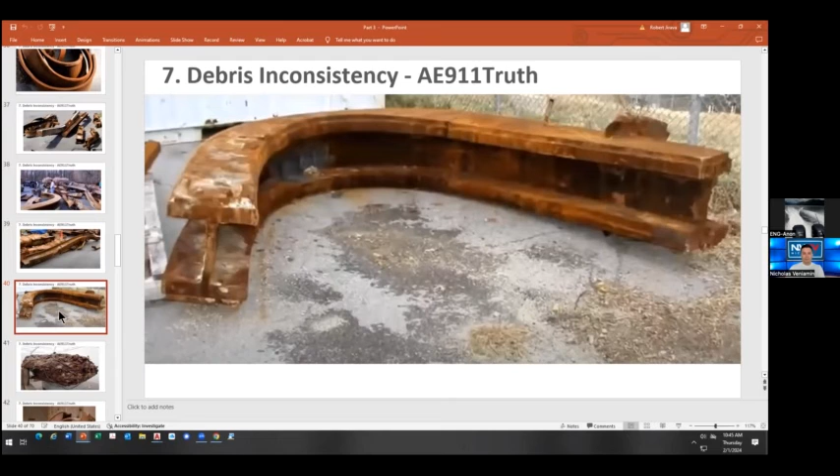I mean, look at this stuff—these are heavier sections lower down in the building that were not in the fire area. These things bent really easily. Here's another meteorite, a bunch of steel and...

But all this heat came from the jet fuel? No, the heat could not have come from the jet fuel, because the jet fuel was only in small areas of the building and would have been consumed very quickly—it wouldn't have had the opportunity to heat the steel as badly. The steel is a thermal regulator, acting like a radiator, radiating heat throughout the building and sucking heat away from the fire area. What's been ignored in a lot of this fire analysis is the heat sink effect of the concrete floor slabs, which would have regulated temperature to a large degree and evened out that heat. So the fuel is almost a negligible effect in all of this, due to how quickly it's consumed and out of the way.

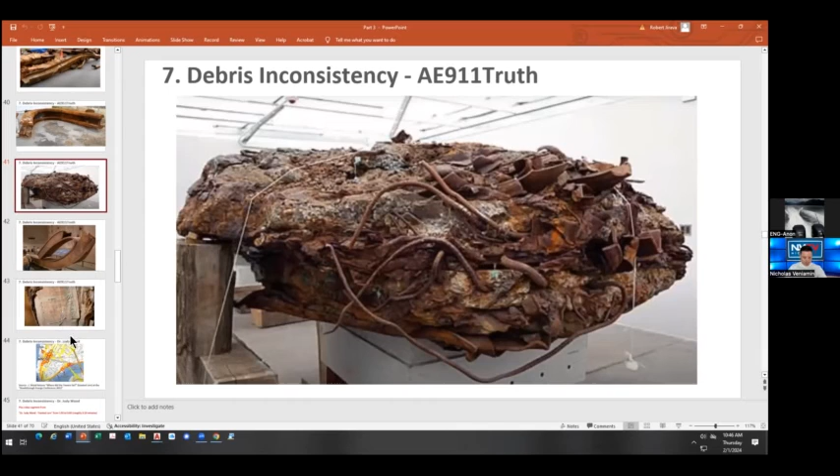Isn't that strange? Very. So when I looked at this, I realized—look at all this steel that's been heated this way, look at all these toasted cars, look at this pulverization of concrete, and look at this third tower that had to collapse and get out of the way.

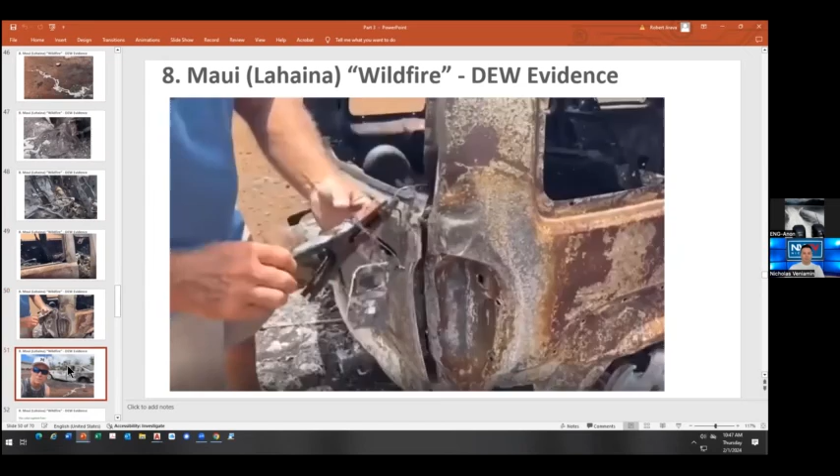Also, I thought about the Maui fires. These are some slides from the recent Maui events, where the cars were very similar in appearance to what we were seeing in New York. And to my mind, that was a directed energy weapon from space.

But this is 2023. We've had the capability of space delivery now. It's been building and building every year. World Trade Center happened in 2001, more than 20 years prior to that, and we didn't have the advanced delivery that we have today.

Going back to this, sorry, what were you going to say? I just said, who knows? Maybe we haven't. They've been hiding it from us. That could be. I'm leading to a hypothesis based on several factors here.

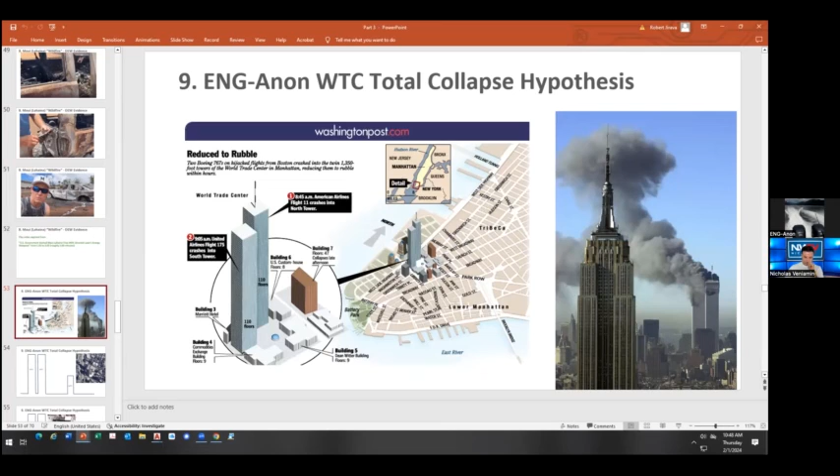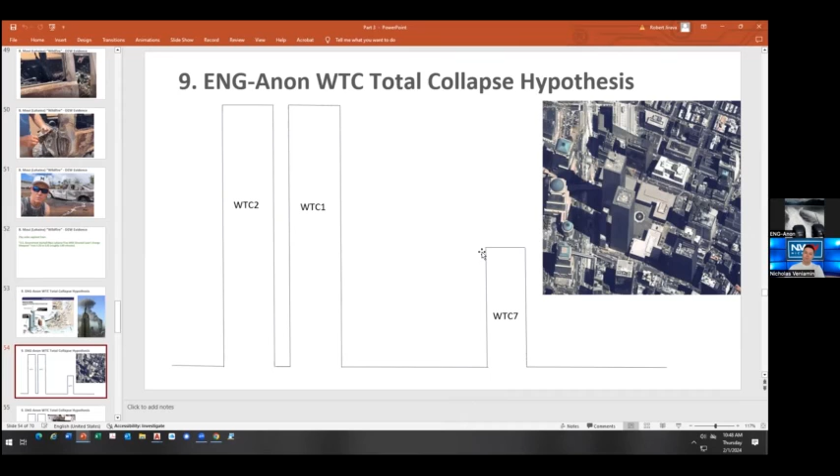I'm looking at World Trade Center 7, the sentinel here standing in front of the two towers, the Zippo lighter if you will, with two cigarettes standing behind it. And we draw a little profile. World Trade Center 7 is drawn not exactly to proportion.

Height-wise it is, but it's a little bit closer to the towers than I actually show here. Recall that power station that was in blue. World Trade Center 7 was constructed on top of a power source. In my hypothesis, that would make it the perfect candidate to construct a directed energy weapon on the roof, because the side of the building facing the Twin Towers had this rather large storefront on the top two floors, this clerestory. It would have afforded a great location to house such a heavy weapon, and it could have been drawing its power directly from that substation, which at the time had several megawatts of power.

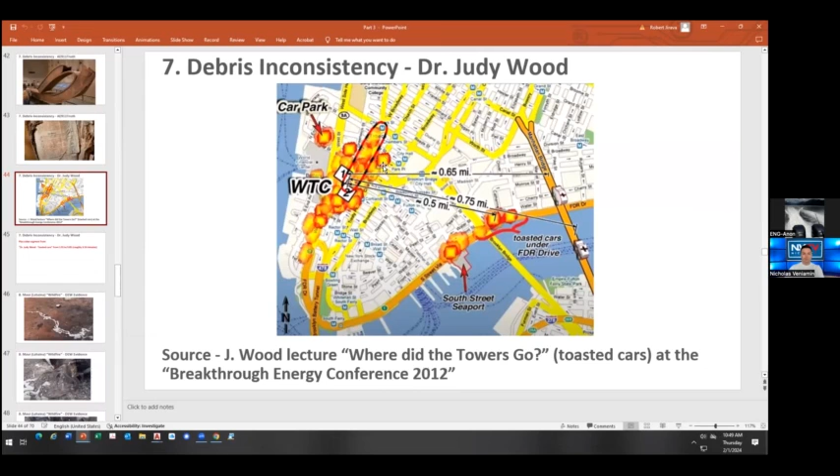So I've come to the end of my allotted time there, basically outlining this hypothesis, Nick.

Yeah, very interesting. After that deluge, what do you think? What are you up to? Well, thank you. I do apologize, first of all, for the short interview. I know you wanted to go for a couple of hours for this. We're just very tight for schedule.

My question is, if Building 7 was somewhat responsible for some energy-directed weapon towards 9/11, would you say that would be the reason why they wanted to get rid of Building 7, to destroy evidence? Yes, my hypothesis is taking that into account, because why? Let's not dance around. They rigged these three buildings to demolish them, okay? Why would they go through the trouble to rig Building 7, the third building, with explosives? What was the point? Was perhaps a third plane meant for that building? Was that third plane brought down?

We've got a lot of conspiracy theories out there. We don't know what happened in Shanksville, Pennsylvania. People are saying that wasn't even a plane crash. Maybe it wasn't. The point is, they had to bring World Trade Center 7 down. However they did it, they had to do it to conceal that directed energy weapon. That's my hypothesis. I'm not saying I'm right. It's a hypothesis. Please prove me wrong. I'm a grown-up. I can take it.

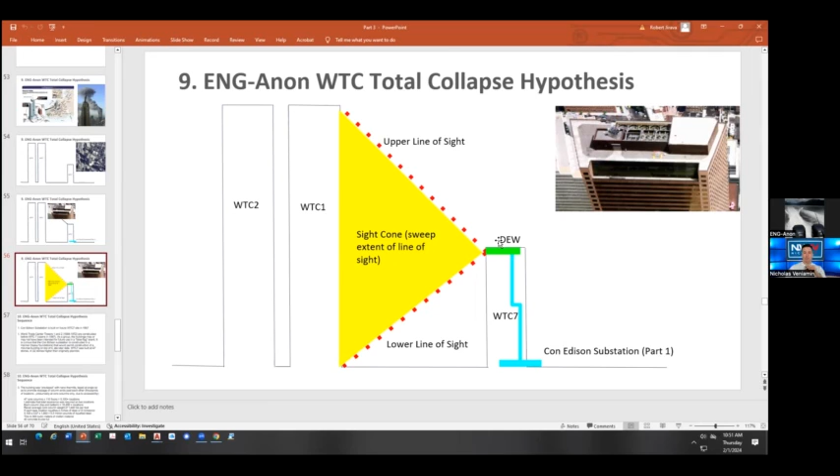Yeah, I'd basically like to say, keep an open mind and talk amongst yourselves. What we're trying to do nowadays is we're trying to raise consciousness out there. That's really the name of the game. Keep an open mind, talk amongst yourselves.

And I guess the next step is, let's find out what the heck these directed energy weapons can actually do. Can we really go that far? Time will tell. We had the congressional hearings recently about the extraterrestrial ships that are out there. This is hiding bigger issues. It's hiding an unlimited power source, zero-point energy. It's potentially hiding other things like this gravity propulsion. And it's also hiding things like directed energy weapons. They're in that category too. So let's shine the light on the truth, shall we?